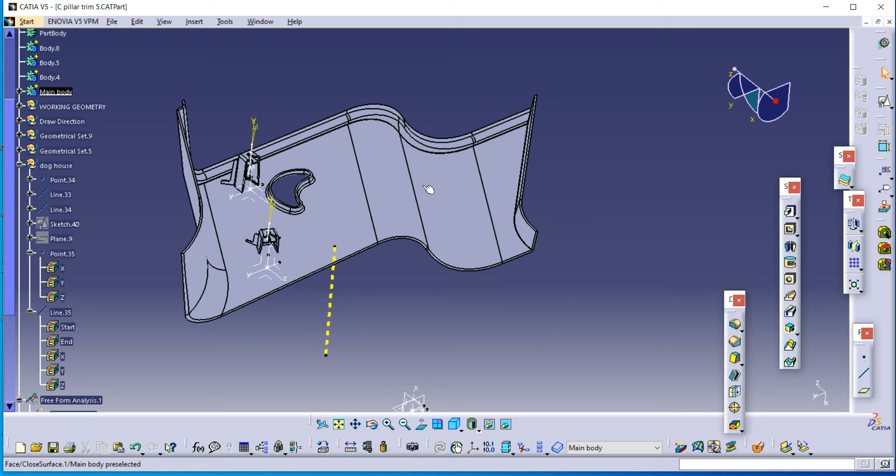Here I will show you how to create the mounting in C pillar trim with a different doghouse. The doghouse is similar, but I will add one more rib in this area. Please watch my first and second video so that you will understand well. Now I will use this power copy.

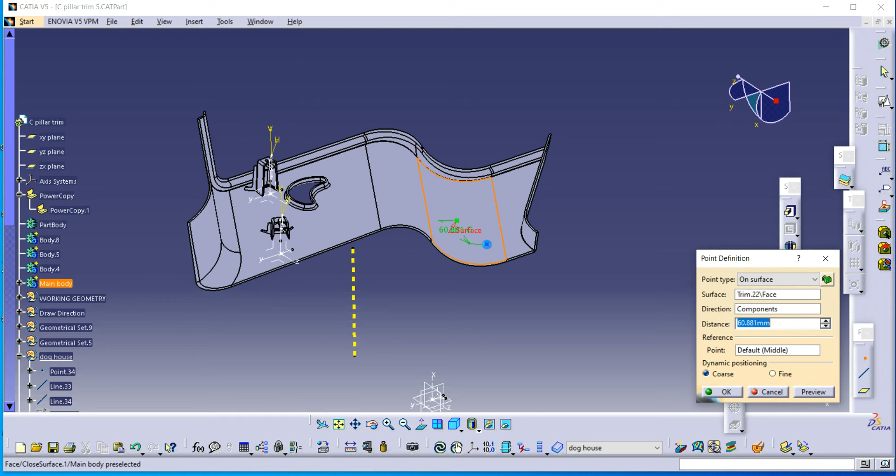Insert instance. Before that we need to create one point here like this. Just isolate this point, isolate this coordinate. Why it is?

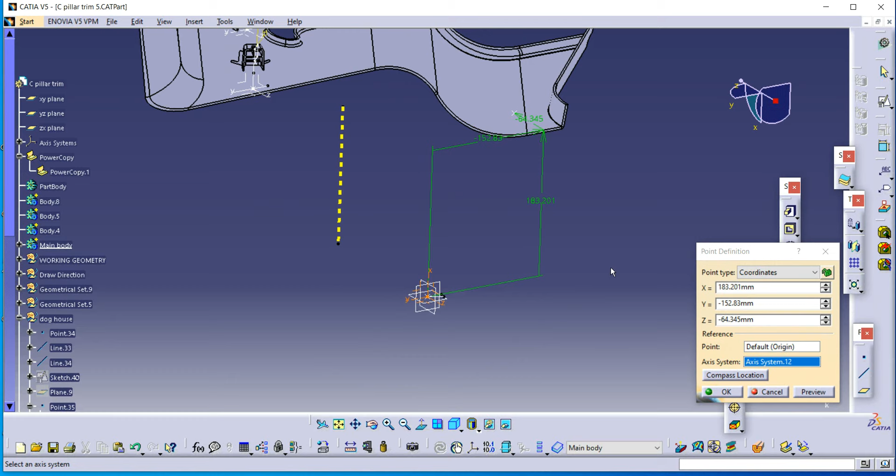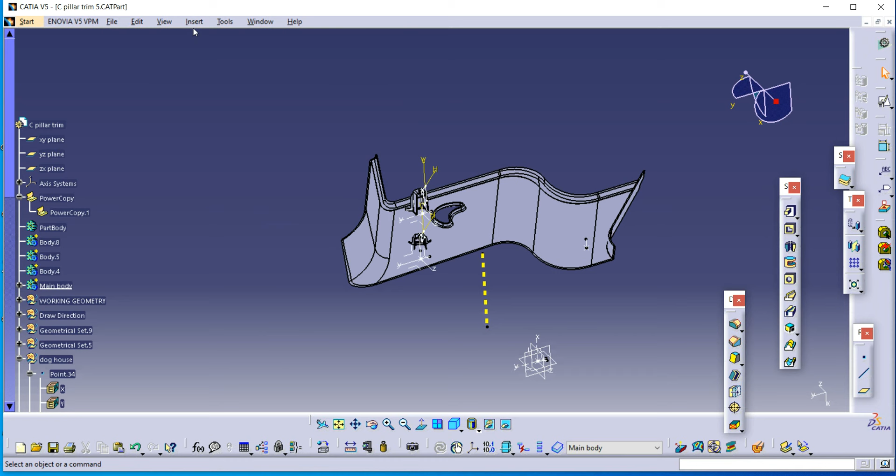Just draw one line in the x direction. Just use power copy from selection here. Select this point and select this line and select this point. Okay, this doghouse is created, right?

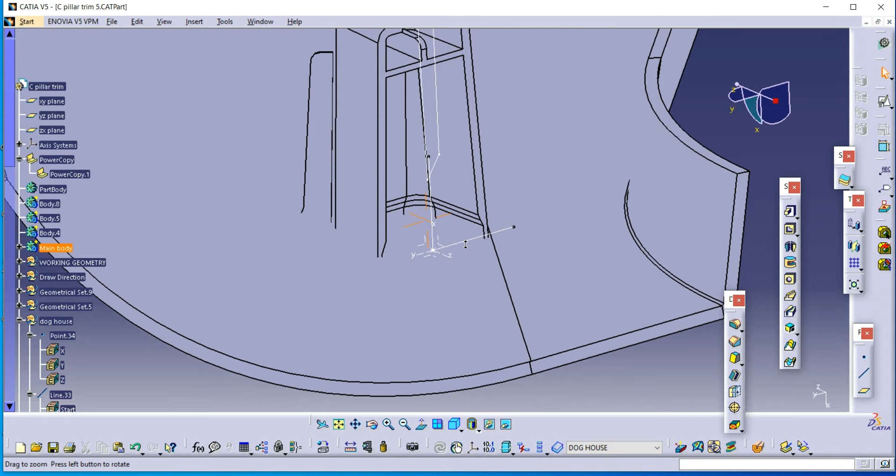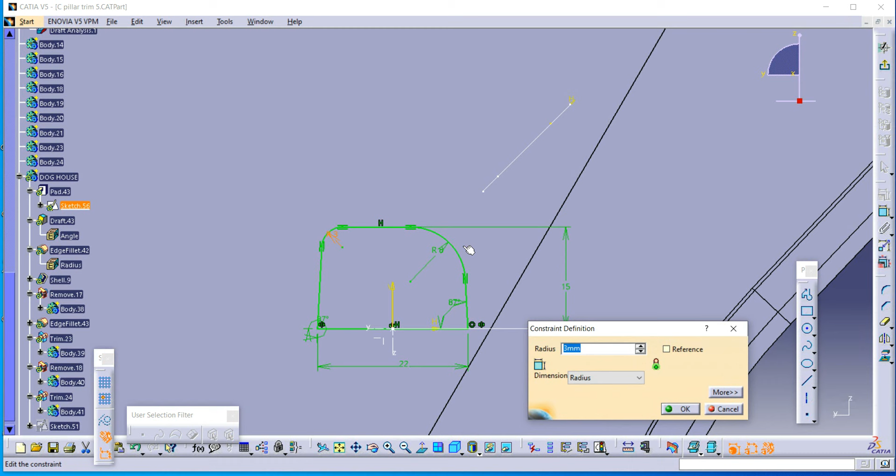I don't want this much height for the doghouse, I will reduce it drastically. Initially I will change this height and reduce its height to 15 mm and increase this radius to 8 mm. This is also 8. 9 also, okay, 9.

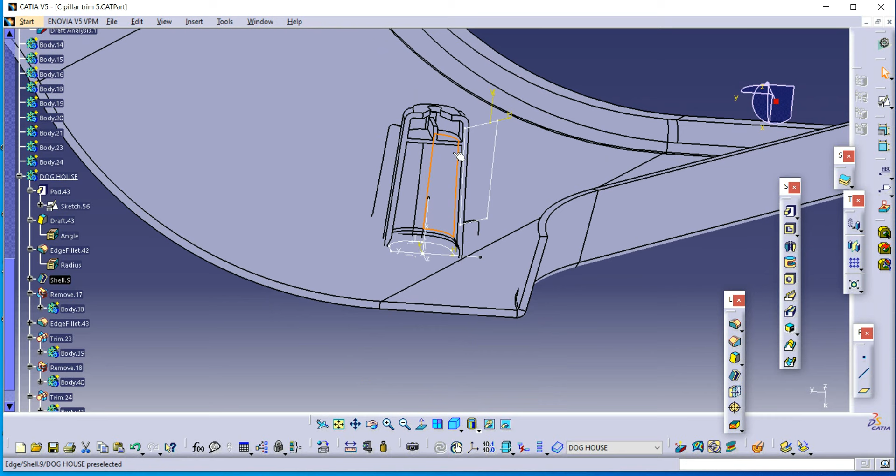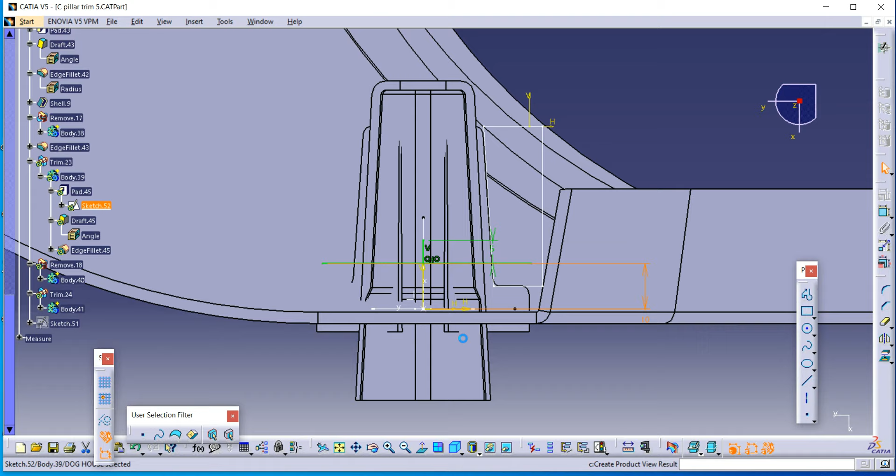I don't want the doghouse this much height, I will reduce its height. Before that I will reduce this inside part's height. I will give it as 10 mm. And this height I will reduce to 10 plus 10, 20 mm.

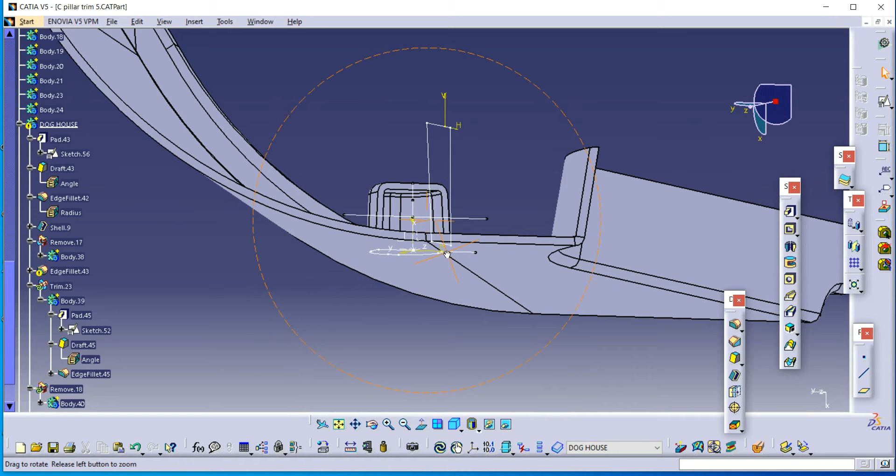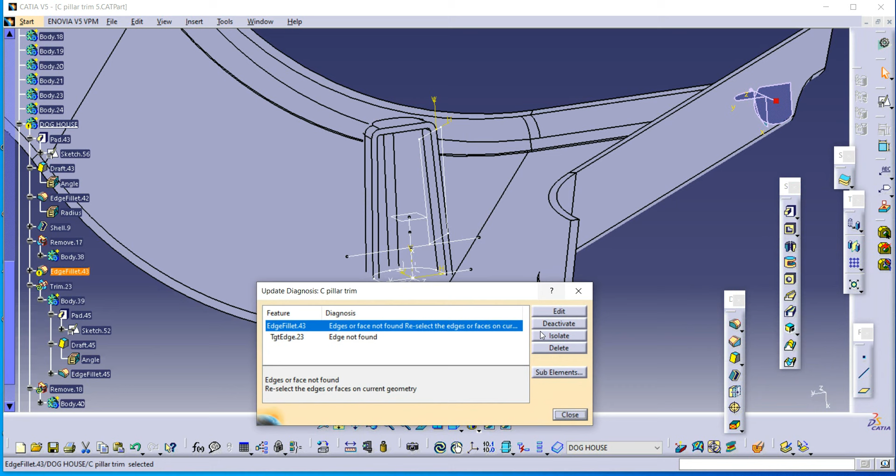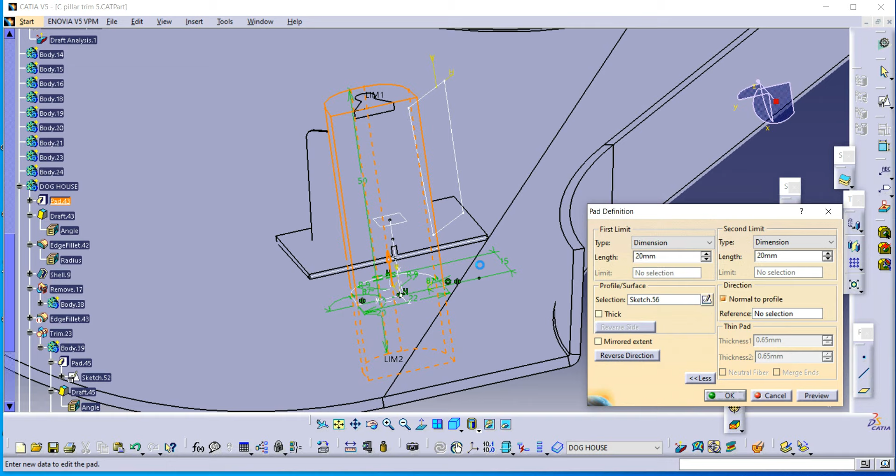Control Z. I will change it to 20, this plane to 20. Deactivate the fillets first, and I will change this height to main body's height. Okay, now it's okay, looks fine.

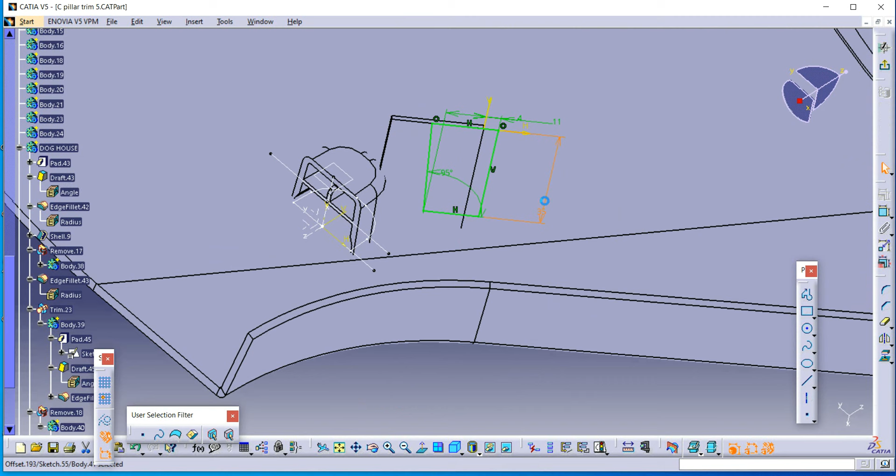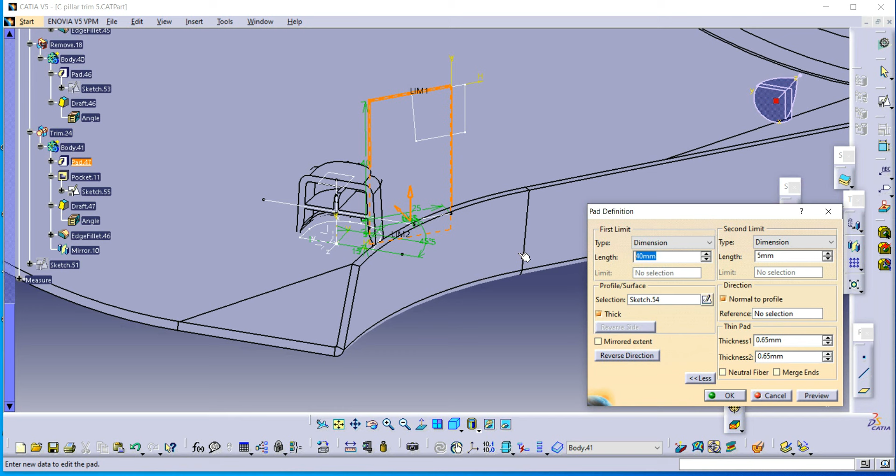And I will change this height of the rib to 15. Change to 15 here, okay. I will increase its height.

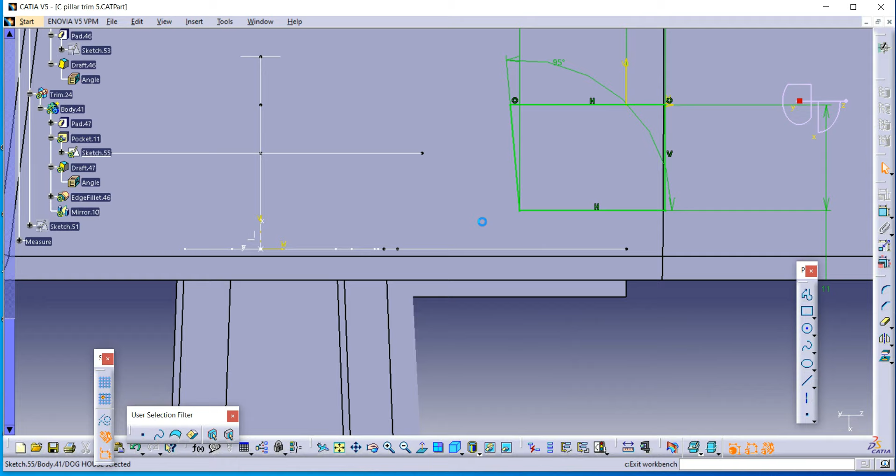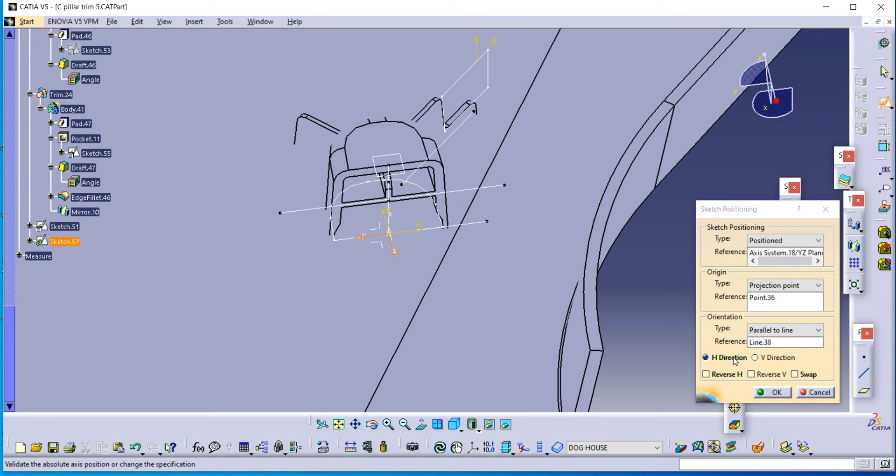I will create one more rib for this part. Projection point, parallel to line. Now I'll draw one straight line here to draw like a rib.

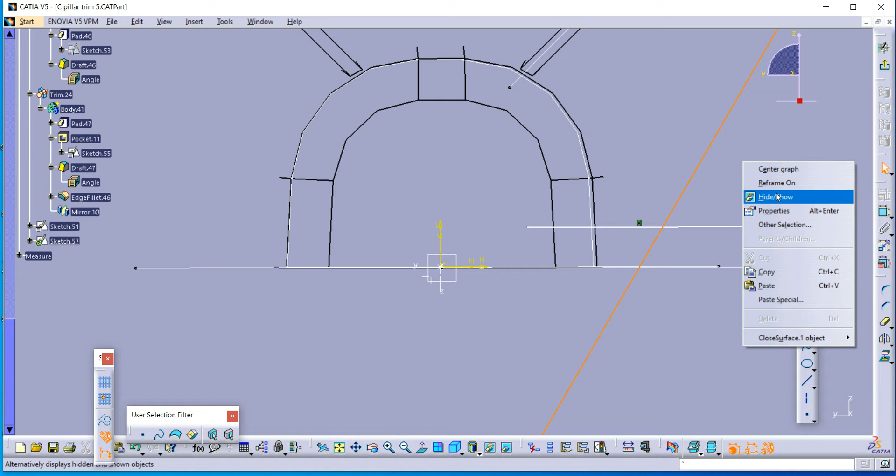These tutorials are advanced tutorials. Anyone already working in Catia can understand easily.

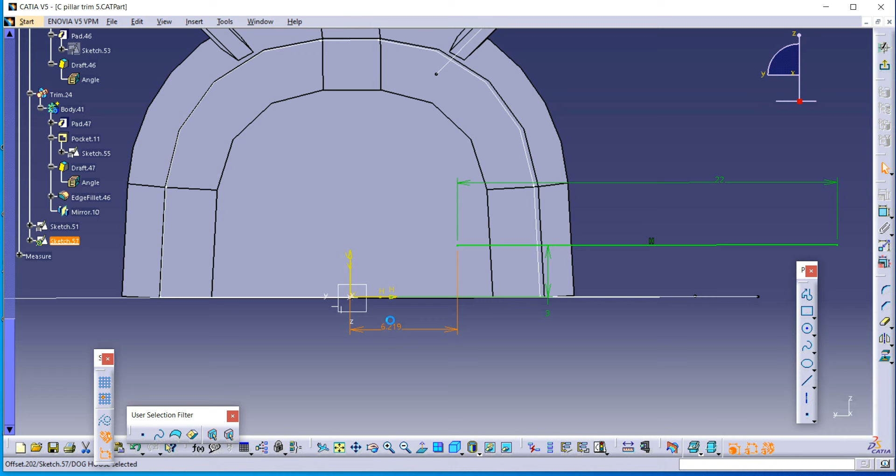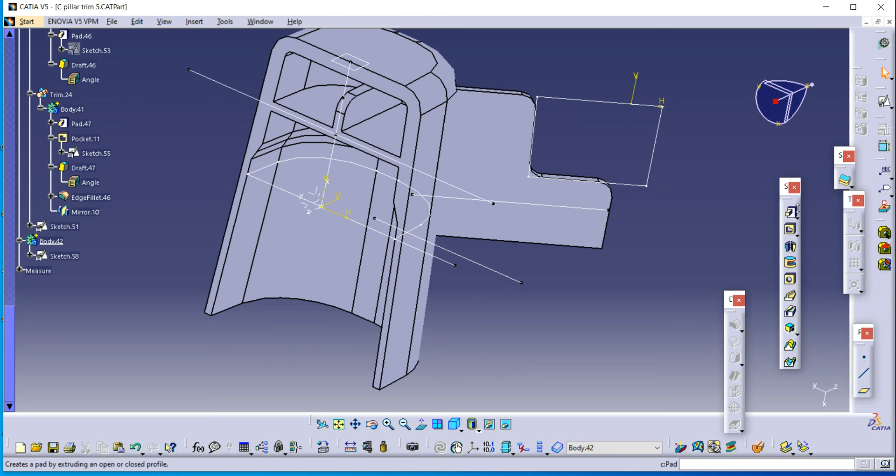Just insert one more body. Control X, Control V. I draw one line. I will extrude this line, thicken and give 15 mm. Okay, yes okay.

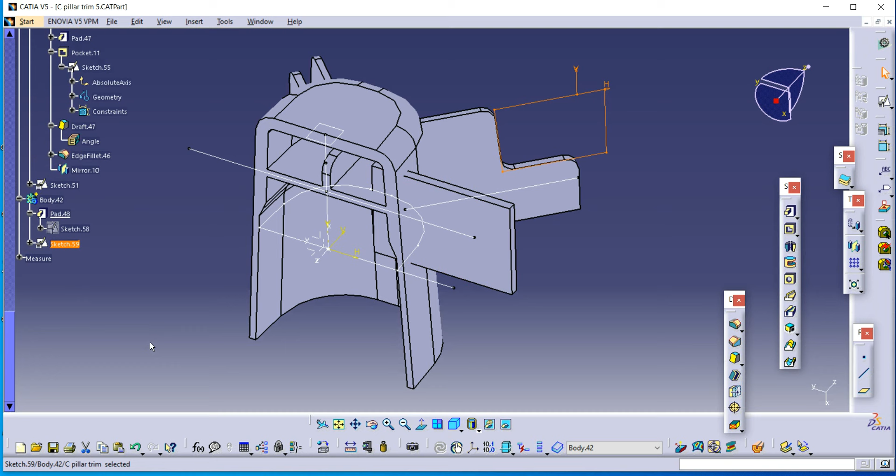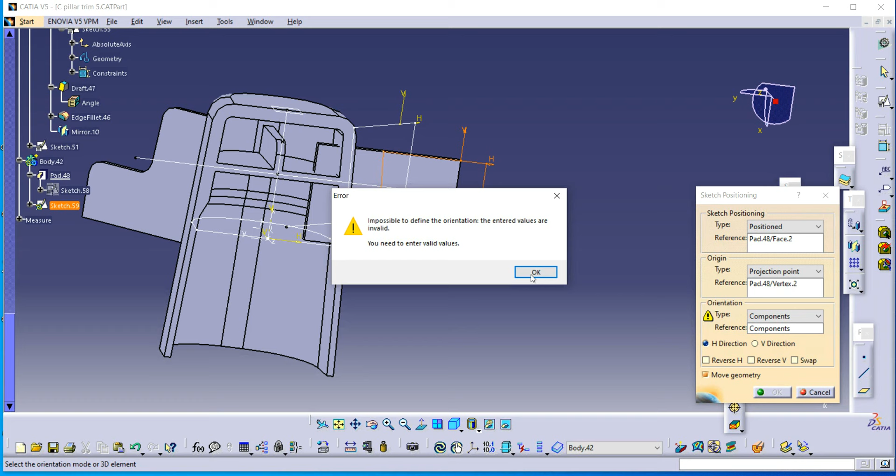I copy this and paste with Control V. I will change this sketch support. This one is the sketch support, and the projection point I will change to here. Parallel line, parallel to the line, this one.

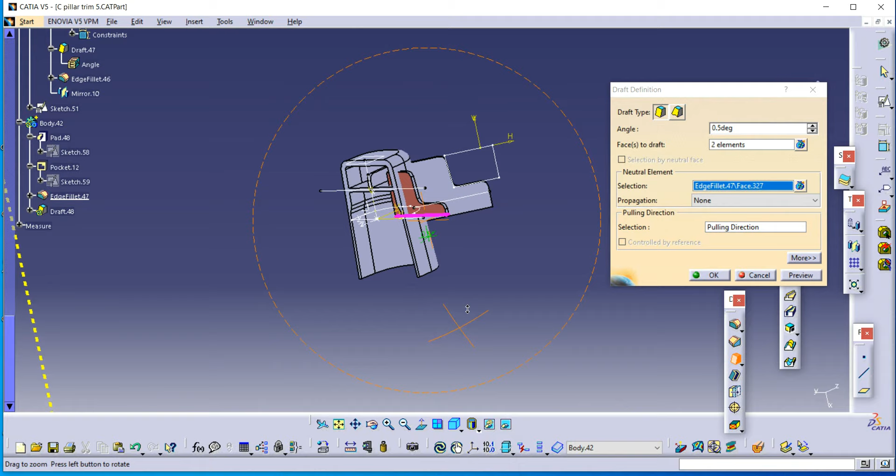I will pad this - pocket this, sorry - 2 mm. In the same way I will give some fillets here, here, and one more area is here. And need to give draft to these faces, the neutral element is this, and the pull direction is this one.

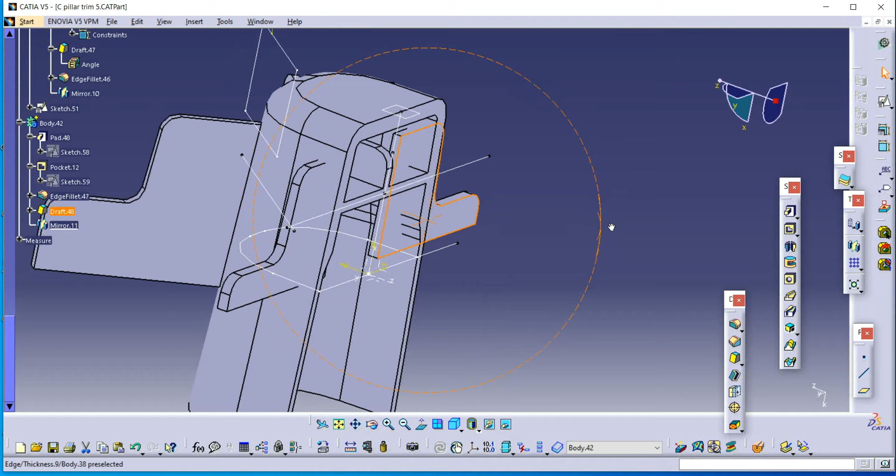Check the preview, this is the opposite direction. Select this. Same way give mirror. Unhide the main body.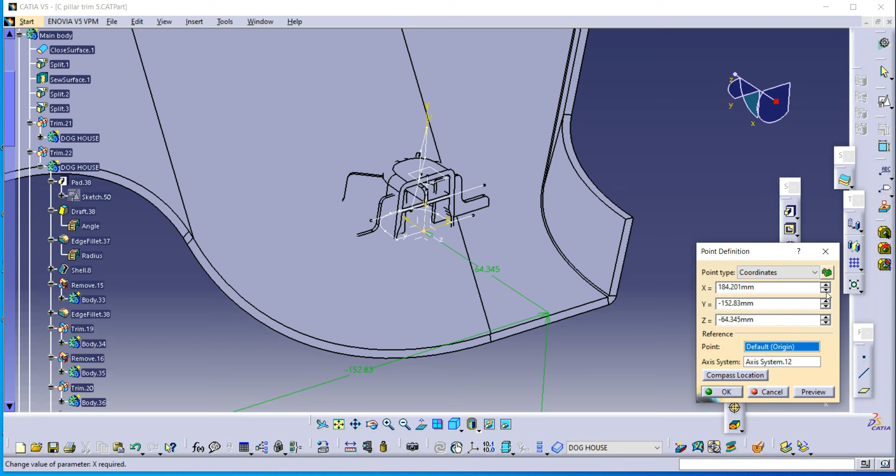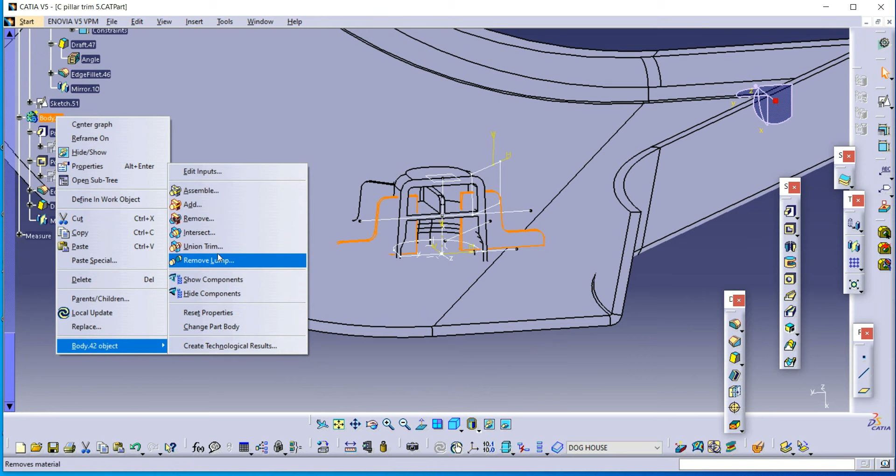Just rotate it wherever it requires. I will move this point. Just union trim. This logo is okay, and keep face is this one.

Now its height is varied, right? This we need to adjust.

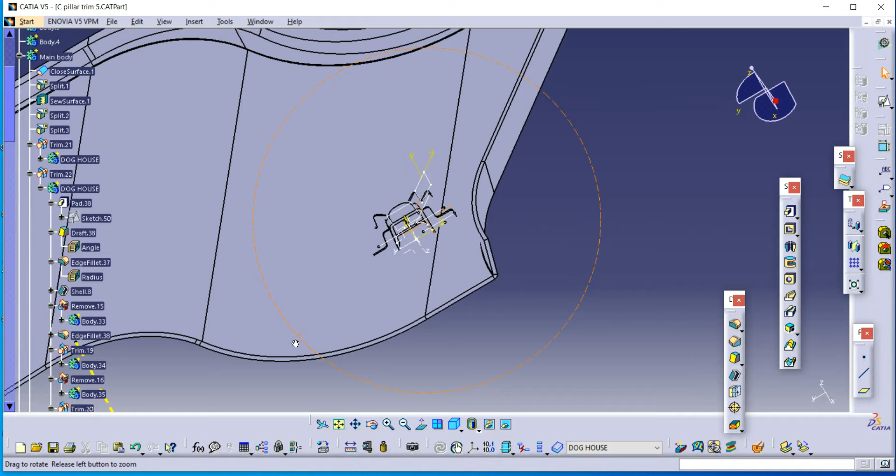These mountings I created here are parametric. If you want to change direction or anything, you can edit this surface which I just created. See, if I move one point, the entire mounting is moved. In that way you need to create the mountings in the plastic part.

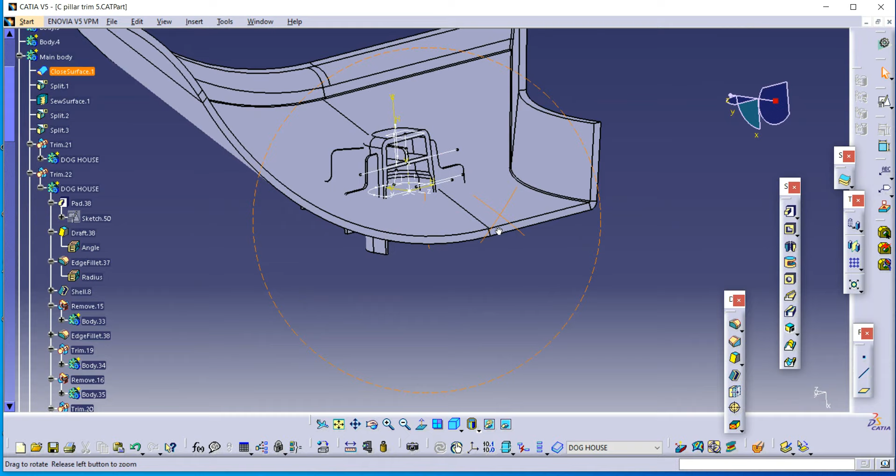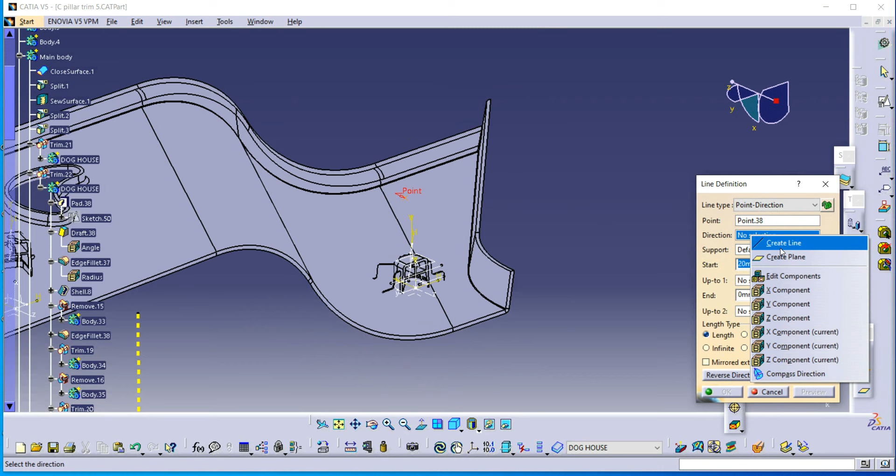Now I will take one more point. I will create one more point here, as x direction, x component, reverse. Okay, now I will make this entire mounting. See, we forgot one more thing here.

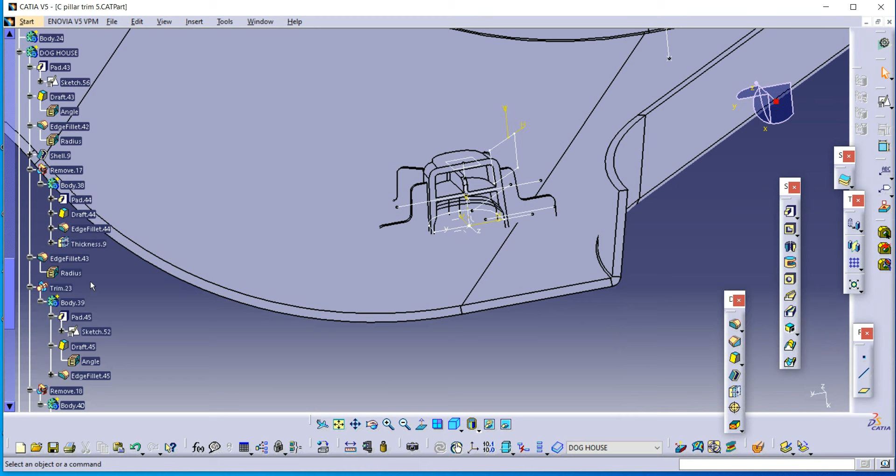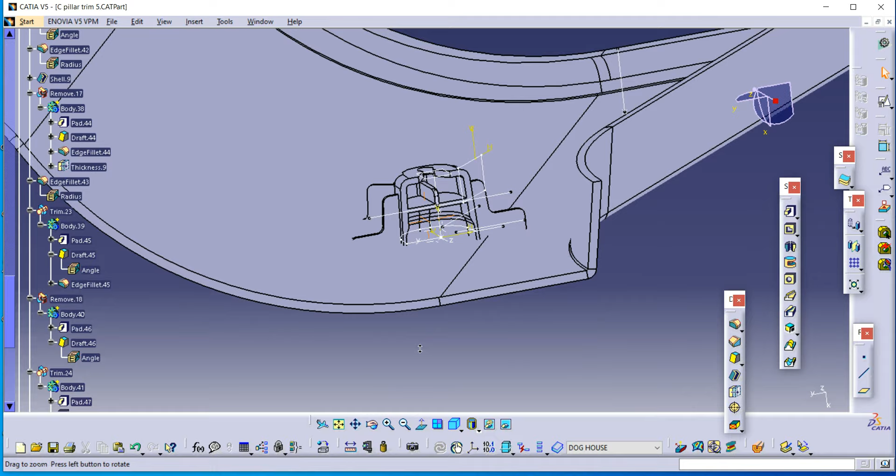This will become 20 and this will become 18. If you watch the first two videos, then only you will understand this power copy.

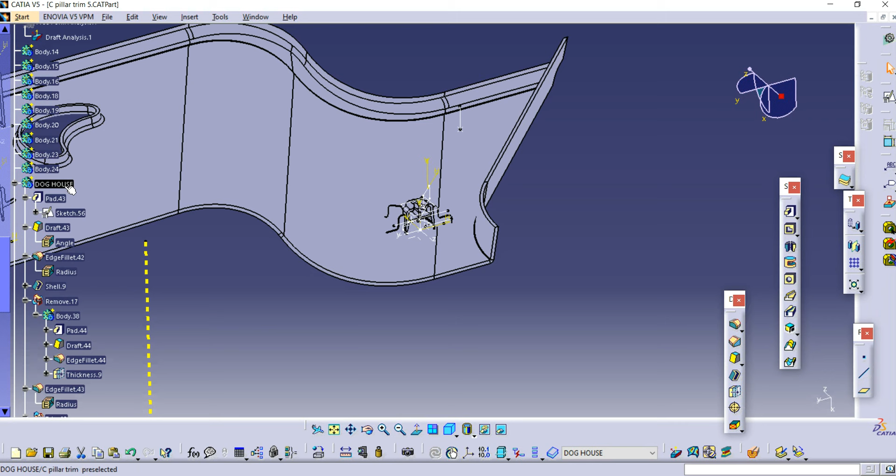I will name it as this mounting, entire mounting, as doghouse 3. Doghouse 3.

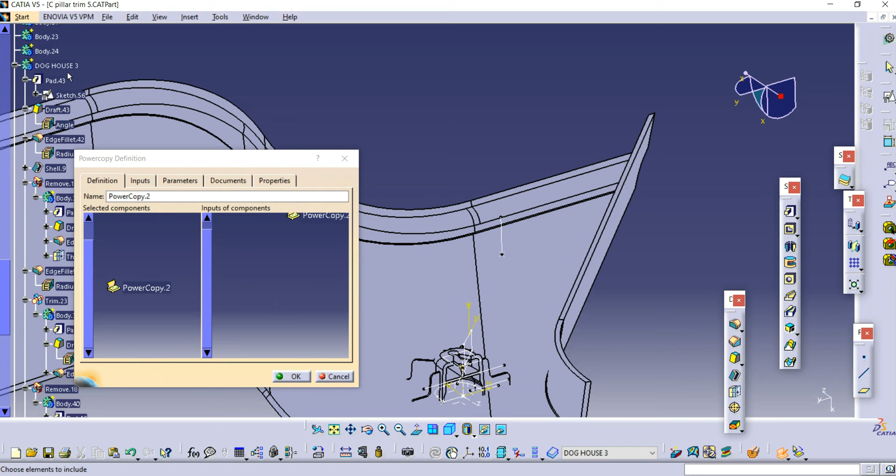Insert, make one more power copy, insert power copy, and select this doghouse entire 3. This one selected here, and I will change the inputs. Select it, select it, select it, select this one.

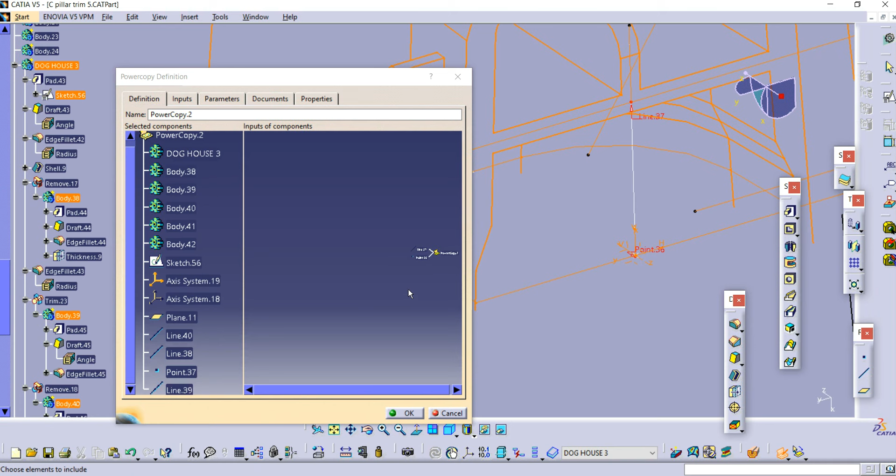4 points are showing, right? 36 point is required and 37 point is required, 37 line is required, this is not required. Okay, 1 point and 1 line. This point is selected and this line is selected. Insert power copy instantiation from selection.

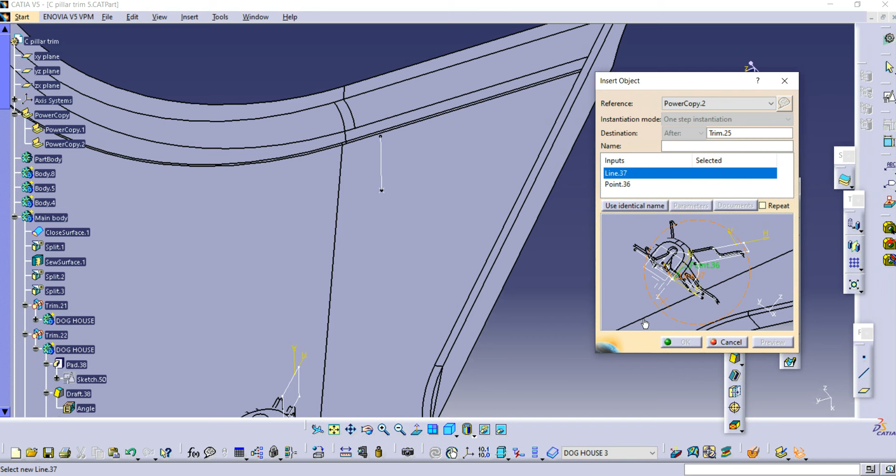Second power copy. See here, first it is asking for a line first. Select this line and point is this one. See, enter, the power copy is copied with respect to this point. Just it is touching here, right?

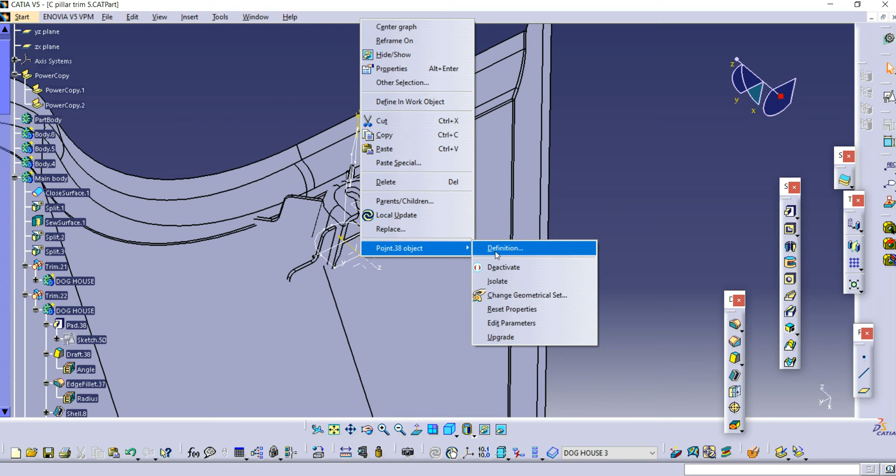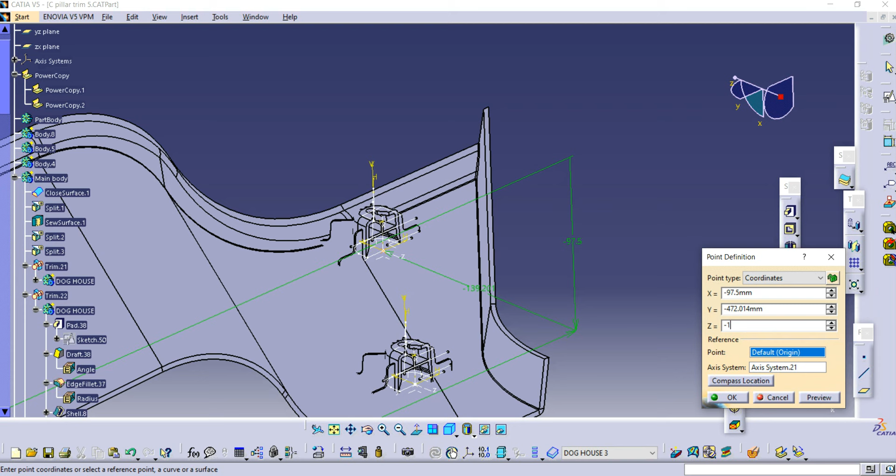I will change this point, isolate and coordinate. I will change this - which one requires to change? Minus 137, change to minus 120. I will give, check the preview.

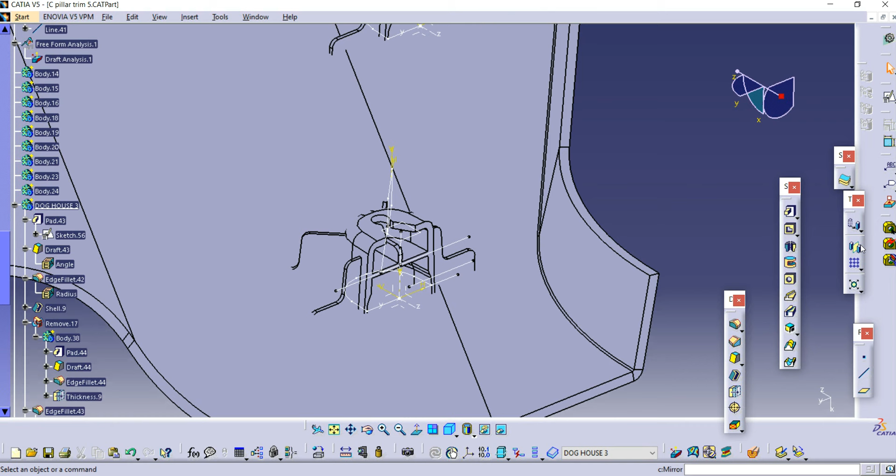Both are in this direction, so it is not correct. So we need to change the direction of these two mountings. Define here and rotate it, with an axis of this one, 25 degrees. The total mounting is rotated. In the same way, this also needs to rotate.

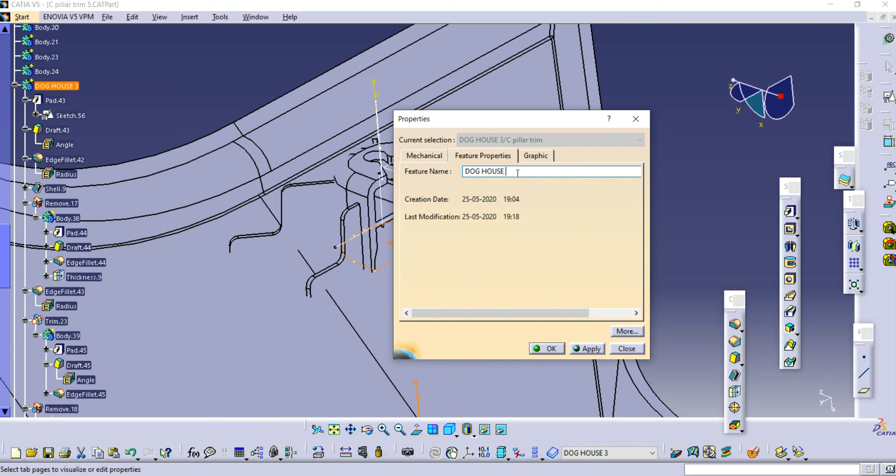Doghouse 4. Properties doghouse 4. With respect to this line, minus...

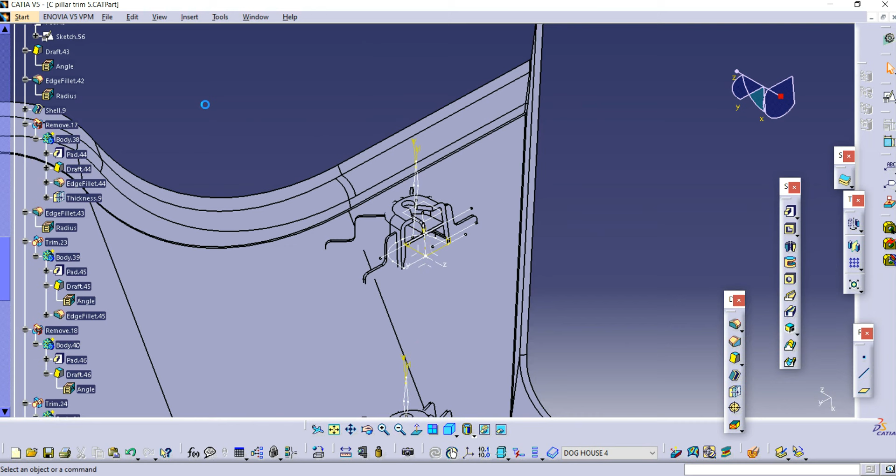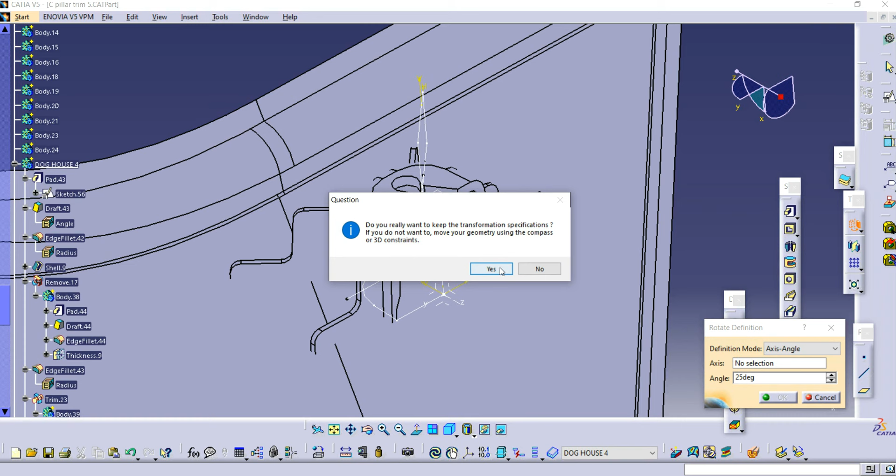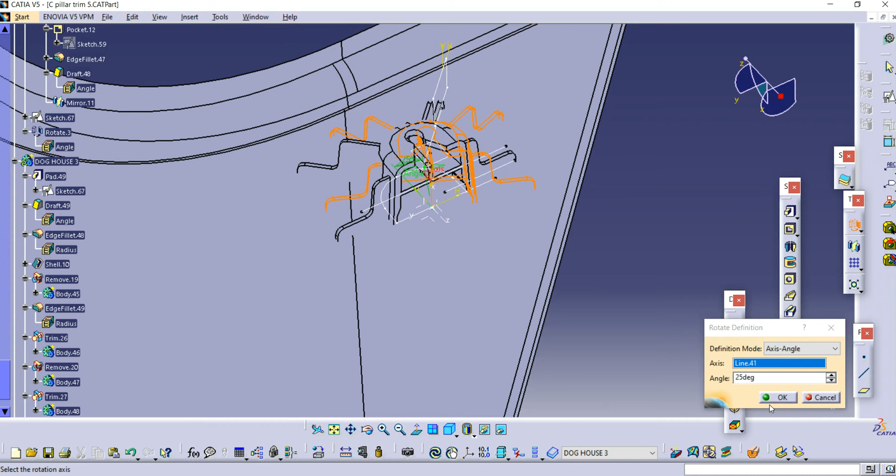Define here. Yes, control shift. I will define here and rotate it with an angle. Increase this angle to 40.

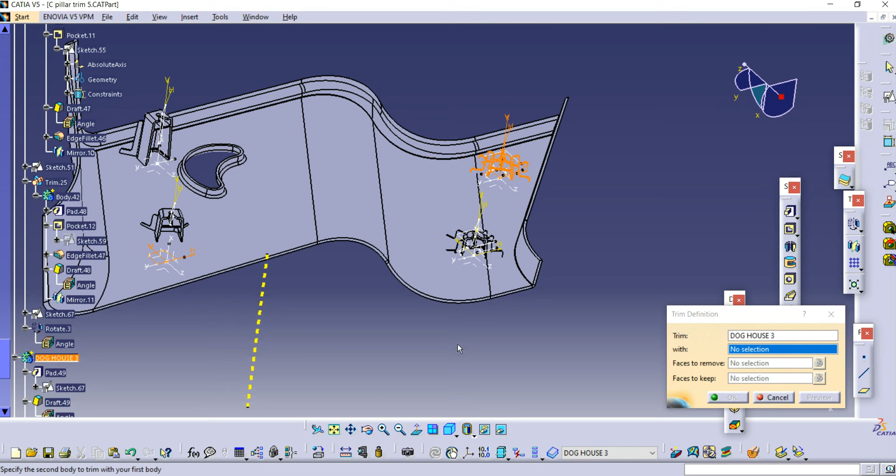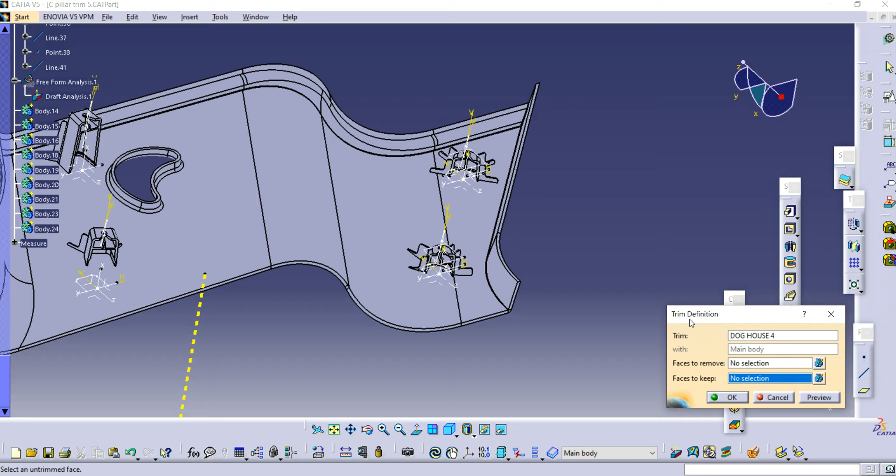Now it seems okay. And you use union trim with this main body and select keep - you can select any face, one face is okay. In the same way, use another mounting and union trim, keep face as this one.

In this way, we finished 4 mountings in this part.

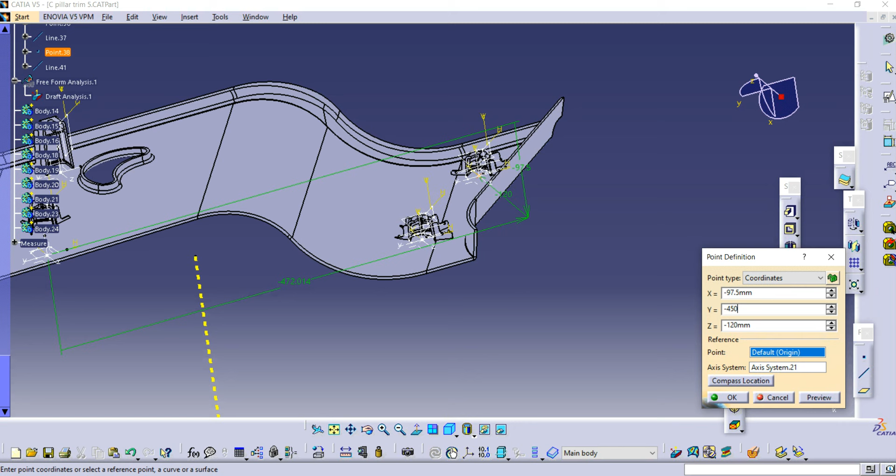If it is narrow, we can change this minus 170, right? We'll change this to minus 150 - minus 450, sorry. My entire doghouse is moved. In this way, you need to create the mountings.

In my next videos, I will show you how to create the ribs and what considerations you have to take before going to create a rib. Okay, thank you guys, thank you for watching.